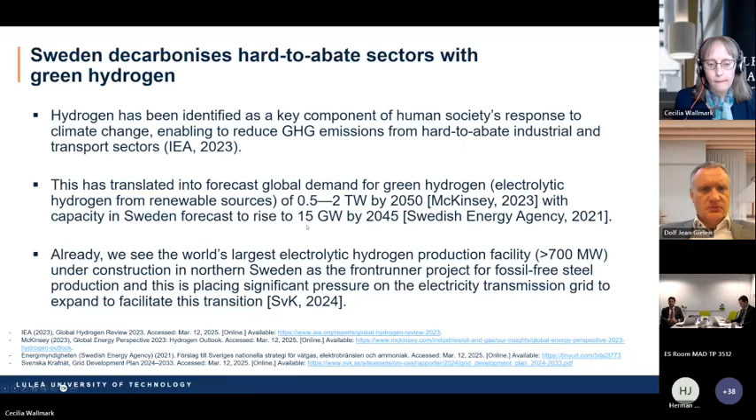This is also a slide showing a little bit on all the activities which are already going on in Sweden. And for the background, we do have a lot of renewable power, hydropower, wind power, and so on in the country. A lot of biomass.

We also have district heating, which is very interesting to see how we could combine with excess heat in hydrogen production or use. There are a lot of sites which have green carbon dioxide emissions. We have plenty of water, and there is capital available for investments.

And as we also represent the university, I like to mention that there have been already around 50 years of world-class research with connection to hydrogen, and of course also regarding the metallurgy questions. So that's also a little bit for the background.

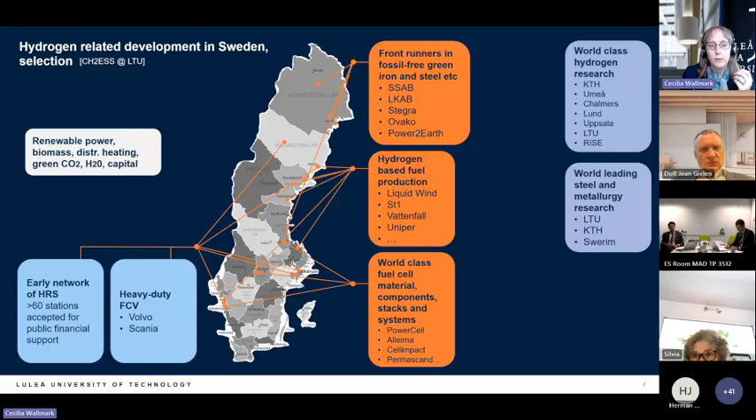And this is really what I hope everyone of you here are already aware of, the Hybrit plant, the first fossil-free steel production that actually showed that this is possible. We can produce steel based on hydrogen to remove the fossil fuels that were used earlier in this process. So this was built and proven and everything, and it started as late as 2016.

So we see this as one of the very good examples of, if you like to do this, you can do it. And the second example that I like to give, that I also think most of you already are aware of, is Stegra, which earlier was called H2 Green Steel, a very, very new company. It's only 4 years old, and they have already built so much of their green steel production plant that they are still planning to have the first production already next year.

And these 2 sites are located in the north of Sweden, where we do need, of course, a lot more power. And there are further sites for ammonia production, and also further sites where the mining company LKAB have planned to have a few of these plants in the near term.

So in total, we will have seen, this is already a couple of years old, but this is some results from the research that we have done to understand how much would the increase of both electricity and hydrogen look like in like 25 years ahead.

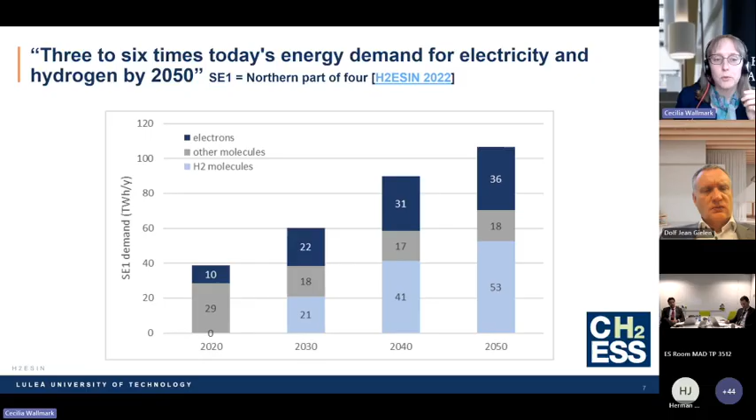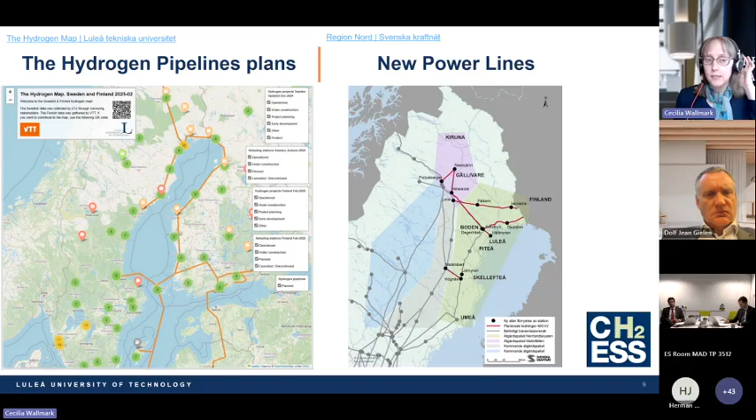So this is what's being built to the right here, and to the left we can see the orange lines, but you can also on this map, and you will have the QR code here to follow the map to see which are all the investments ongoing in Sweden at the moment regarding the hydrogen plants, industries, hydrogen refueling stations, and so on. You can also in this picture see a little bit about all the activities in Finland as well.

Based on this—this is in Swedish, but the title says it all—there is a new governmental task given to the National Power Grid TSO to include planning for hydrogen pipelines. This was placed last year, and they are expected to present their first findings already this autumn. This is so interesting to compare, since this is completely new. This type of co-planning hasn't been forced before.

So based on that, I've collected some questions and statements I'd like to share. I think it's important to understand that the future needs are huge, but also unsure, which means we have a lot of huge investments, which will give a lot of local impact. We will see the impact of, for example, huge land use if we place wind power production additionally in an area, but the power lines and hydrogen pipelines will also have local impacts.

We also need to realize there are differences between these two energy carriers—we can speak about that the whole day. We have to think about and include safety and security. We're also into the questions of combination and cross sections, co-planning in the landscape of these two energy carriers. And we have to consider whether local use or export is what we like to head for, and what different types of investments actually mean for the future.

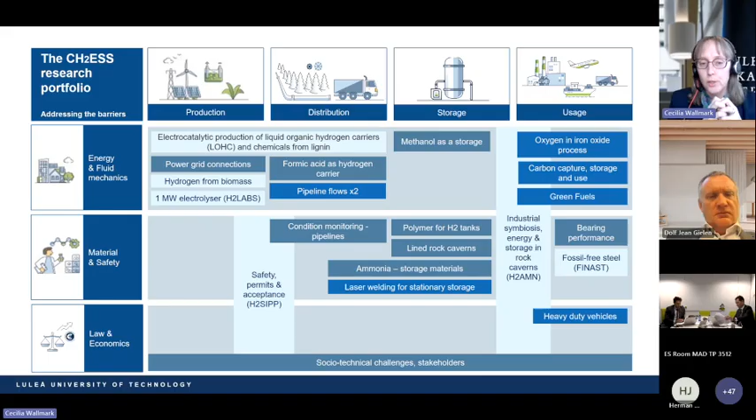This is what we are very happy to do and work with, together with both industries and collaboration partners, as I said. Since the subject of this specific seminar is the combination and planning for the electricity grid, I'd like to mention a group of research we do regarding the hosting capacity—how much

hydrogen could actually be produced given the existing power grids. So we do research, and in this meeting I also have my colleague Peter Haigh with me for further discussions in the end, if that happens.

For example, we're working on operational risks—could we decrease the requirements of the power grid to be able to produce more hydrogen? That's the question, and it's quite relevant. How much could smart grid solutions help increase the possible hydrogen production range? And of course, energy storage and flexibility solutions are both possibilities to increase the amount of hydrogen possible to produce with existing infrastructure, but we could also earn money on flexibility solutions.

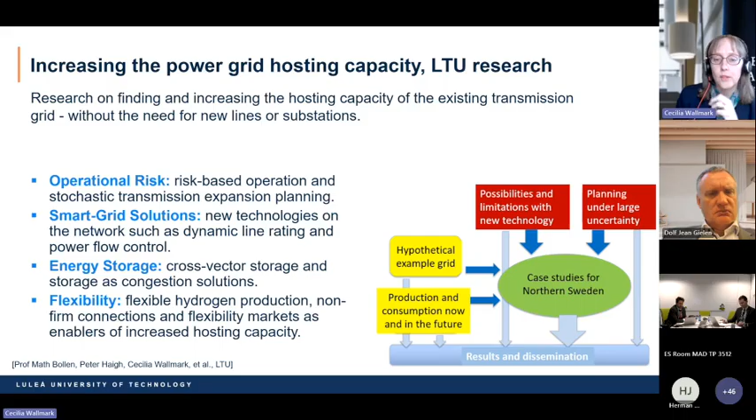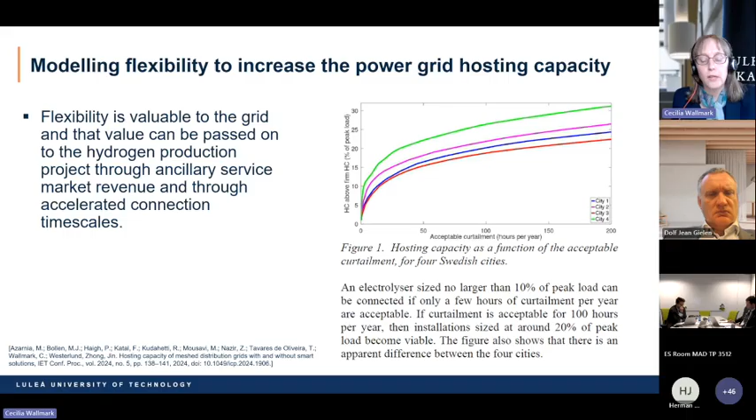So this is very much ongoing research in our university. Here is an example from one paper where we show that if we can accept curtailment only a couple of hours a year, we could actually increase the hydrogen production by as much as 10% of the peak load of the whole city. So these types of modeling and calculations are also part of our research.

And then I'll conclude with some major points, and I also give you a recommendation if you'd like to hear more from me - there's a pod available for the public. But here I have my 3 top-of-mind questions regarding the need for both research and, of course, implementation.

I think it's so very important to have and see political decisions supporting this implementation. You're all very well aware about the risks and the different thinking and prioritization of politicians, but not least, public stakeholders need to continue to support this. This is very, very important, and we also see it very strongly in the north of Sweden, where industry is working in very close collaboration with municipalities, the region, us as a university, and so on - which is completely necessary to get the whole value chain working.

The next question is really how to keep the sustainable part of the development. We see very difficult questions regarding social acceptance, political acceptance, and so on. Here it's very much a question of supporting attractive societies, I would say.

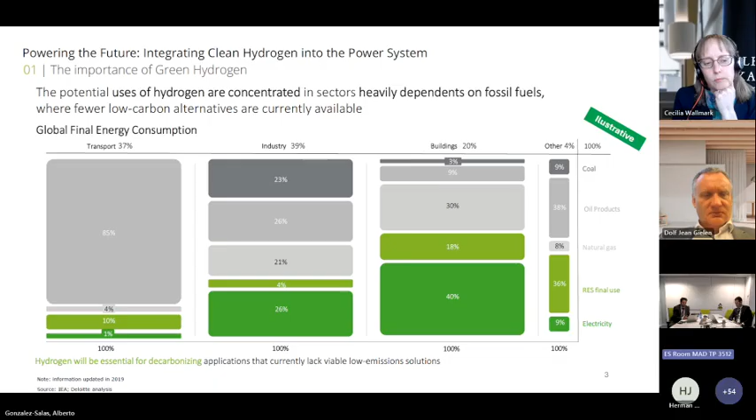So I have a few slides talking about the importance of green hydrogen, but I'm not going to stop here because I think we all know why we need hydrogen. We need hydrogen mainly because it's the only way the world understands or knows how to decarbonize certain industrial processes - otherwise we're not going to be able to decarbonize these things. And also because we can use it for other things, and it can substitute several fuel alternatives that right now we don't want in the future.

There are some uses of hydrogen that we need to understand are not the best right now. Probably electrical solutions are much better than hydrogen-based ones, but this will change once the price of hydrogen goes down. We need to understand that hydrogen is not an energy source, it's a vector, an energy vector. So we need electricity to produce hydrogen, and we need electricity also sometimes to use the hydrogen.

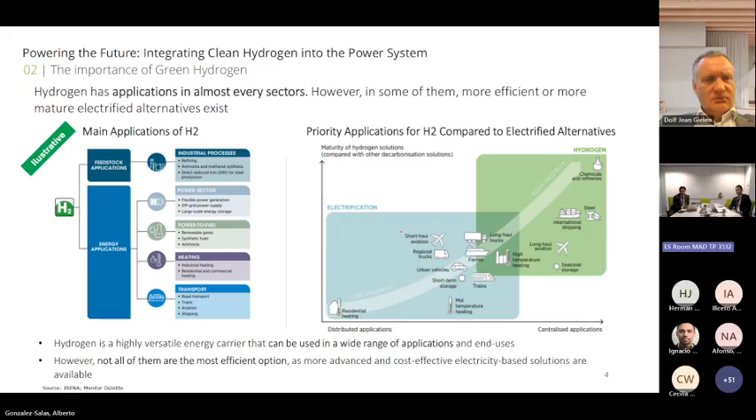And this is a stress for the grids. This is the point of the seminar. As I was saying, we are going to use it to decarbonize industrial processes, and also for production of sustainable products. An opportunity for the electricity system is that hydrogen will be the energy storage of the future, much better probably than batteries, or a complementary use to batteries for energy storage.

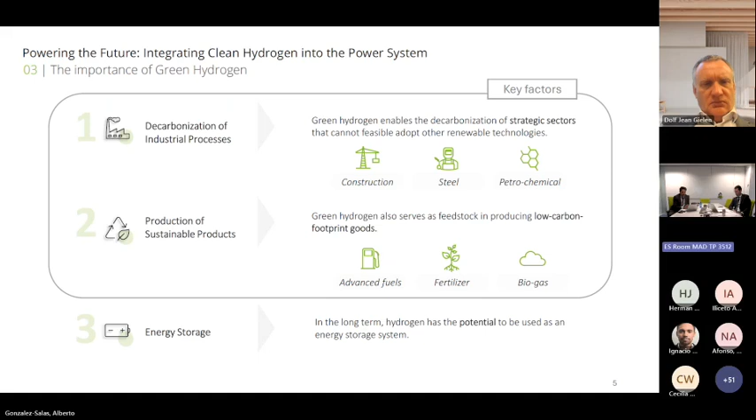But let me go through this data, which shows the challenge we have for the grids. The challenge is to balance the growth of electrification of society, which we have decided to do as a world. We have decided to decarbonize our economy through electrification and also through the use of hydrogen, which needs electricity. So we are going to increase the demand for electricity enormously, for any country, whether for hydrogen production or for the regular demand that comes from electrifying the economy.

And in the middle, we have the grids. When we talk about hydrogen, we can think about producing it just with dedicated renewable generation, or we can connect it to the grid. We can do both things. The issue is that once we have more than 4,000 hours of production of electricity for hydrogen production, the price will go down. And the economics are quite relevant on this issue.

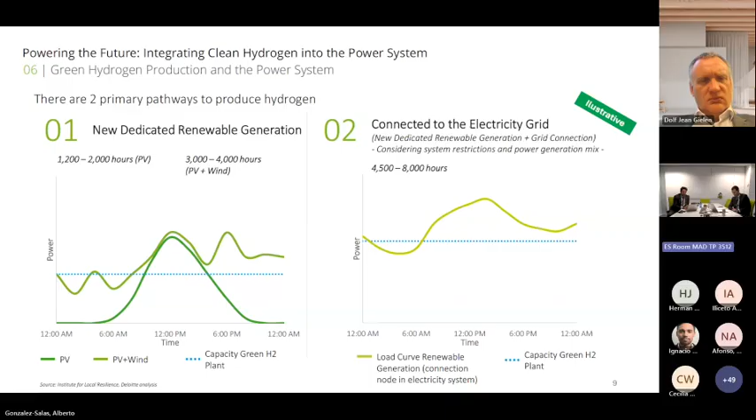Unless electrolyzers develop differently or become more flexible, as my colleague was saying previously, we need to think that hydrogen production has to be connected to the grid, because this is the only way to bring the price down. And if the price doesn't go down, we're not going to use hydrogen. So it's quite important to be able to produce hydrogen with dedicated renewables in the countries that need it, and also to connect it to the grid, and to increase renewables on the grid as a whole. So to guarantee project viability of hydrogen is directly related to the number of hours it's going to produce.

Can you go back one slide? Here's an important data point. What we see in the production models is that when you have more than 4,000 hours of production, you can achieve a more stable cost in your production. That's illustrative, obviously, but we can see in the graphic on the left side, with only a standalone solar plant...

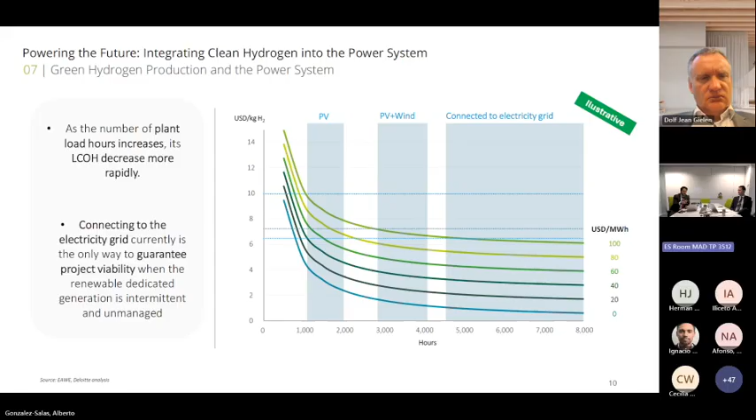So when we're talking about producing hydrogen, we need to think that we also need renewables, not only for hydrogen production, but also for the grid. Because if the electricity grid is not decarbonized, we will produce hydrogen, but it won't be green. So we need to be able to do both things in any country. Obviously, there will be countries, for example our country, Spain, with a big penetration of renewables, but there are several other countries that don't have this right now, and they have to think about this, which means connecting new generation to the grid for producing hydrogen.

That point is very important because the opportunity of hydrogen, as the previous speaker said, is to have green hydrogen or clean hydrogen in order to contribute to decarbonization. But the best opportunity is to reduce the dependence on fossil fuels, especially in countries where fossil resources are not available.

So when we are talking about the grids, we need to be able to manage the connection of hydrogen to the grid, also to incorporate additional renewable production for the grid, and to maintain it as a renewable power system, because the grid is for everyone, not only for hydrogen production.

And at the same time, I think this is quite important: hydrogen has to live with other decarbonization processes, for example transport and electric vehicles. So we need the grid to be able to support not only hydrogen but also electric vehicles.

Also, when we are talking about decarbonization through hydrogen for industry, they are usually going to consume much more electricity, not only for the hydrogen but also for the transformation of the processes. So the demand of the industry is going to be higher for the grid.

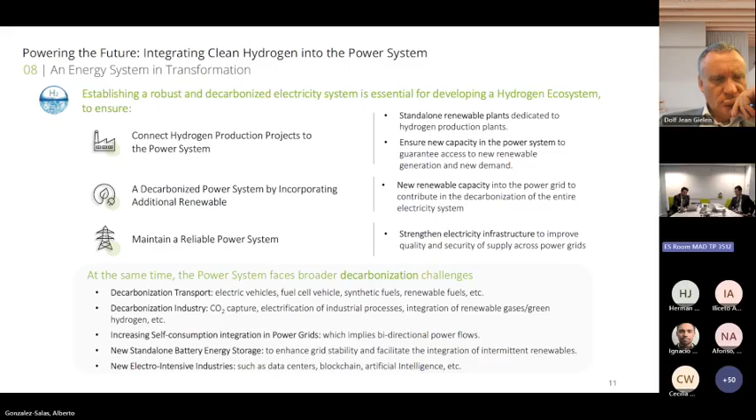But when you are talking about producing hydrogen, you need to have a decarbonized system. Otherwise, you are going to produce it only with dedicated renewables, and this is not going to be sustainable in the future. Let me say it like this.

So countries like China - you were talking previously, Dolf, that we have projects in many places. Right now, I think it was this morning, one of the main companies in Spain made an agreement with Morocco for developing the Sahara, huge production of hydrogen. Turkey, Egypt, Australia - all of them want to be in a position as producers of hydrogen.

But their grids need to support all the environmental factors that we have been talking about previously - more demand from industry, more demand for data centers, more demand for electric vehicles, etc.

And not all the networks are as ready as the others. This is not only about developed or not developed countries - it depends on how the power system developed through the years, the history of the networks, and how ready they are to support this pressure.

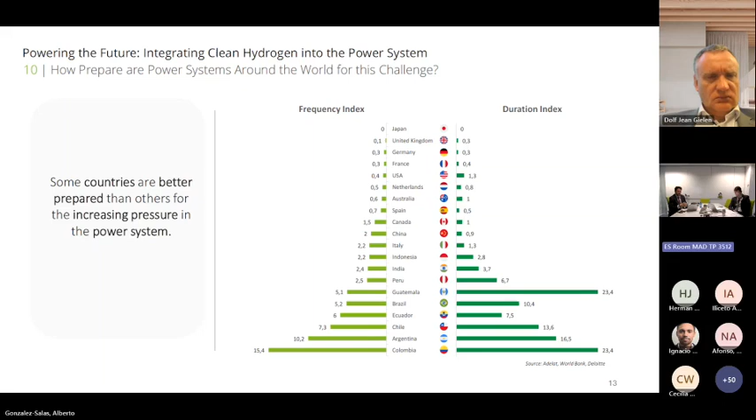There are regions even in Europe - we have several examples where the congestion maps are quite heavy right now, not even thinking about producing hydrogen. This is the case, for example, in the Netherlands, or we have the same in Spain. We have several places like this.

So when Dolf was talking in his introduction about where do we produce hydrogen - not only which country, but where in the country can we produce hydrogen - this is not so easy, because the grid is going to be the point that determines if you are able to do this, whether in 6 months, in 2 years, or in 7 years, because the grid needs to be developed.

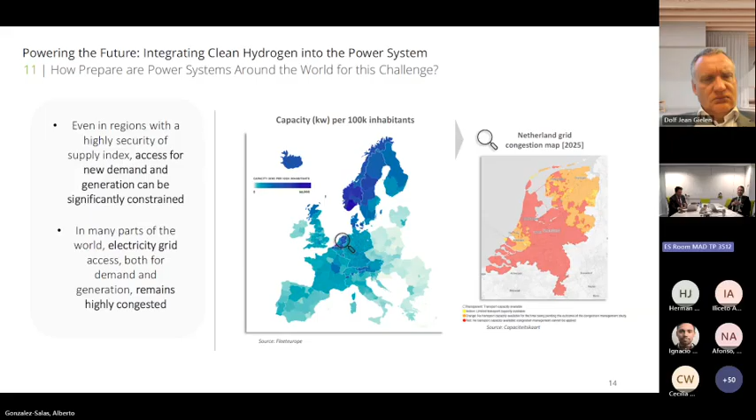Even when you have capacity in the grids, it's important because you have to connect the points of production with the demand, and typically they are not together.

Most of the projects are focused on the hydrogen valleys, but in future project planning, you have to reinforce those networks because you need the connection to a grid. You need to make new investments. The main hydrogen production projects across Europe are next to the consumption, because it's difficult to think about producing hydrogen very far from consumption, as we don't have the pipelines for using the hydrogen, and also because the network needs to be ready for this.

When we connect a hydrogen plant to the grid, it's not the demand of the hydrogen plant that's the problem for the grid. The problem is that you need to be able to maintain the system working for the rest of the users. That's the problem for the grid. Even if the investors can pay for the connection to the grid, of course they are going to do it, the rest of the users of the grid are the ones who have to pay for the rest of the connection that you need to do.

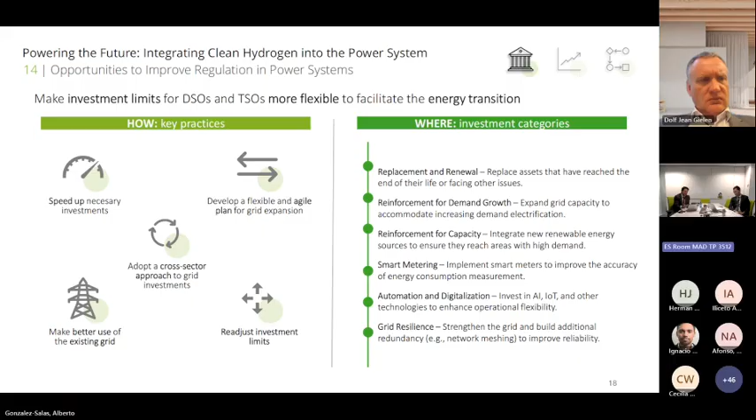Cecilia has said it: smart grids, flexibility, storage in the grid. This is not so easy to develop in the grids. This is not something we can do in 1 or 2 years. It needs to be planned, and the companies need the right regulatory environment to make those investments, because otherwise it's not going to be developed.

And this is all about the remuneration model and also the tariff. Who is going to pay for it, as we say in Spain? There are many things on the grid that are usually paid by the users, so the users need to understand what they are paying, and the tariff needs to be properly designed so that users pay only for what they own, not the rest of the decarbonization we are going to do, because otherwise the tariff is going to increase too much, and this is going to be a problem for any politician or any country.

Let me go back, I don't have too much time. You are going to have the presentation for any discussion.

Our conclusions about this is that we need to ensure the reliable grid access, to be able to connect all the renewable energy that we need, and also the demand we are having, including hydrogen production. We need to advance on a proactive and cross-sectorial approach to grid planning.

The example that Cecilia mentioned is, for me, a great example. In many countries in Europe, companies are demanding this. Okay, we made a bet as a country for hydrogen — this makes a lot of sense, but we are not making the same bet on the grids, and the grids need to be part of this.

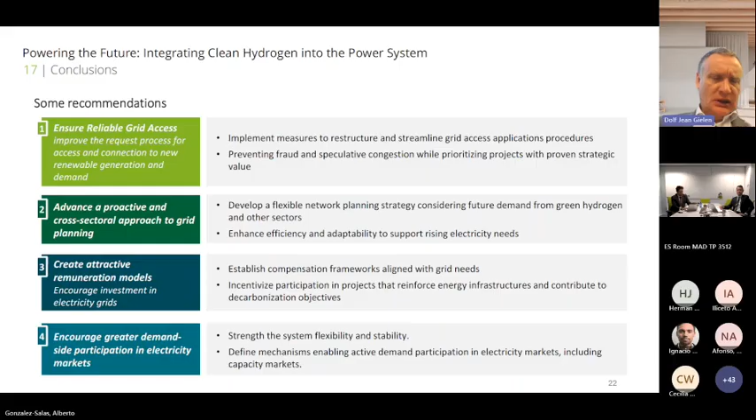Thank you, Alberto and Noe. I think this was very, very interesting — more of a grid operator perspective. I think the next presentation is a nice continuation of that, because we'll hear from Antonio Ilceto, who is an advisory board member of Dii Desert Energy, but who's also employed by Terna, the Italian transmission system operator, in international operations within strategy, planning, and dispatching.

His field of activities includes coupling of systems, including hydrogen and EV impacts on power grids, and he is active in many international organizations. Antonio, the floor is yours.

Thank you, I understand the slides will be moved centrally. If you can put the first one, or shall I share the screen? Ignacio, can you show the slides? Yes, absolutely, I can share the screen, maybe it will be better. Can you see them? Yes, Antonio. Can you go to presentation mode? Yeah, thank you. Like this?

Yes, perfect. I present here some results from CIGRE, which is an international association of electrical engineers and grid professionals around the world. We have recently concluded a thorough study on hydrogen, which will also be mentioned later on. There I'm chairing the Committee for Power System Development and Economics. I understand the time here is paramount.

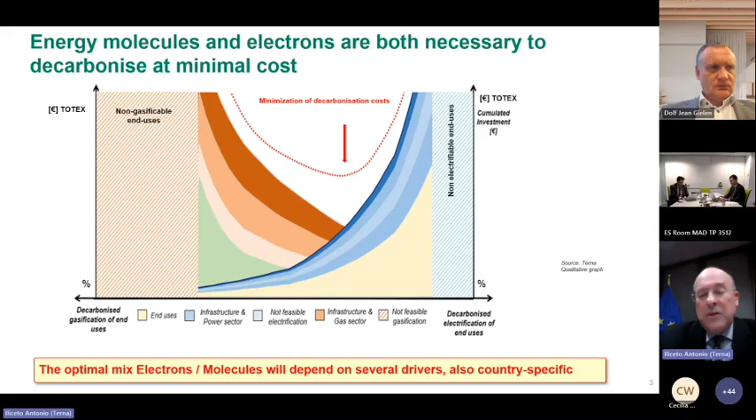Well, first of all, one of many possible representations of why we need both molecules and electrons. And by molecules here we are talking about hydrogen and derivatives, because there are some decarbonization processes which can be easily or cheaply done by electricity, others which cannot, and the same is conversely valid also for gas, for not-gasifiable end users, let's say. So there will be a mix, an actual technical-economic minimum between how many electrons, how many molecules. This depends on the processes, but also on other drivers — some of them are also country specific, so there is no one-fits-all solution here.

So in general, taking a very system-wide approach — I will use this system approach all throughout my presentation — from an energy system perspective, not only electricity, but gas and hydrogen, these three have to cooperate a lot. We can talk about direct or indirect electrification. Direct is when we can change an industrial, residential, or building process from a fossil energy source to plain electricity.

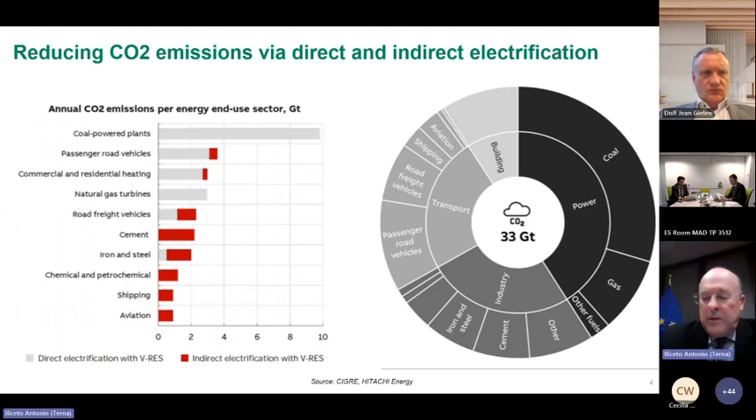So this is direct electrification, and this is one of the most important drivers of the electricity system, including grids, in the next decades. For other economic sectors, we talk about indirect electrification — if we are referring to green hydrogen produced with green electricity. So in the end, it's electricity used for final users through this hydrogen process, always starting from the abundance and increasingly cheap availability of renewable sources. That's why until 10 or 20 years ago it was not feasible; now we have a lot of cheaper electricity from renewables, so we can use it also in this way — indirect electrification.

For reason of time, we won't go all through this table, but just to mention the principle: which way, direct or indirect electrification, is better depends mainly on technologies which change over time. Luckily, we are evolving fast in the technologies, and on all the cost of the supply chain, because case by case the supply chain can be different. Not only production of hydrogen, but also delivered hydrogen cost is relevant here.

All in all, we can say this starts to be a bit old already, because something is already being challenged in the transport sector. For light-duty vehicles, there is quite a convergence, an international consensus, that direct electrification with battery electric vehicles is more convenient. While for heavy duty and other forms of transport, this is still something to be observed, depends on technology. And for industry, there are definitely some high temperature industrial processes which cannot be electrified directly, so molecules are the best option. Then for domestic and commercial, it depends on each single case.

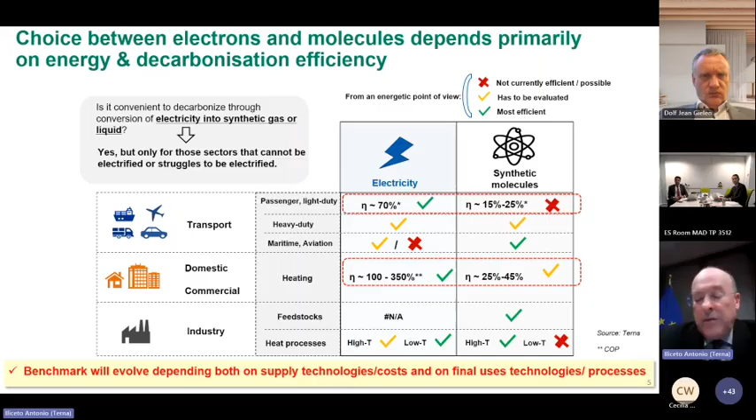So this has to be taken carefully, because it's not electrons against molecules, it's not a religious war where I want only electrification, direct or indirect. It has to be seen sector by sector, I would say even sometimes case by case. And this is because we have to incentivize new technologies, those which will be more efficient from a decarbonization point of view: €1 spent and how many grams of CO2 avoided, but also efficiency in terms of energy, and efficiency also in terms of infrastructure, because if we can use existing infrastructure, we save a lot of new investments.

So there is no consensus on all the decarbonization best processes, but there is consensus that in the end, the final case will be with a lot of electricity and also some decarbonized heat.

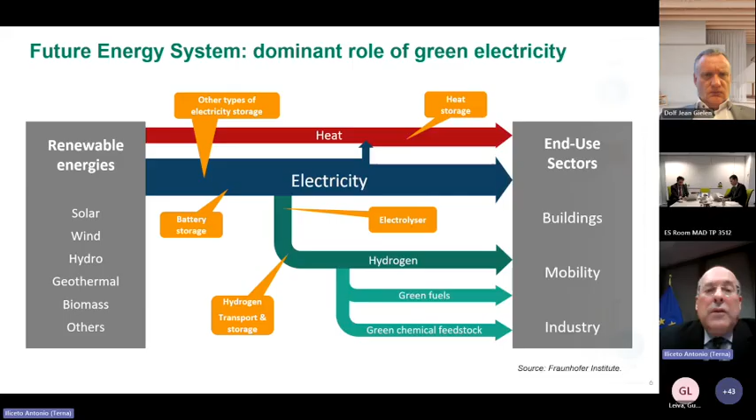Hydrogen will come from electricity, so we will have the three main vectors: heat, electricity, hydrogen. The yellow boxes that you see here mean that together with this new future system, we need to develop and deploy a lot of storage in the form of heat storage, battery storage, other kinds of electricity storage, and then all the hydrogen transport and storage infrastructures. So it's not only the electrolyzers.

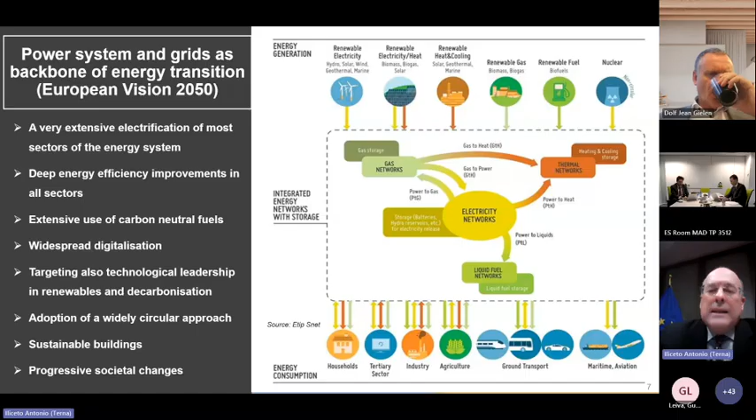In the end, one of the many nice figures you can find around in literature and webinars is that if you consider the integration of electricity networks with gas, then part of the gas becomes hydrogen, and some new hydrogen network is developed, also thermal networks, district heating, and other kinds of networks will be developed. All in all, electricity networks play a central role, because when you talk about sector coupling, most of the times the sectors are coupled through or with electricity. That's why I focus my presentation especially on the electricity side.

So the impact on the power system, we can say there are four main points. One is electrolyzers come with a lot of new renewable generation, so there is an issue of the need of a huge quantity of new generation capacity. The second point will be on the planning, the third on operation, and the fourth on flexibility. Let's see them one by one.

First of all, as mentioned also in the introduction, the very first decision when you have a business case—because you don't build the electrolyzer and just operate it waiting for somebody to offtake and buy electricity day by day—you need long-term planning. It's an industrial investment, so you need to know where to localize your electrolyzer, and how to transport to the final use. The two main cases, which are extreme, with a lot of partial in-between cases possible, are: place the electrolyzer where the renewables are available, so you avoid transporting electricity but then you have to transport hydrogen; or the opposite, place the electrolyzer where the hydrogen demand is, and then you need to transport the electricity until there.

There are many considerations here, but the main point is, first of all, for very short distances we talk about hydrogen valleys, which will probably be the first cases to be built, where electricity production, generation of hydrogen, and consumption of hydrogen are all concentrated in a small area, so no transport and storage infrastructures are involved.

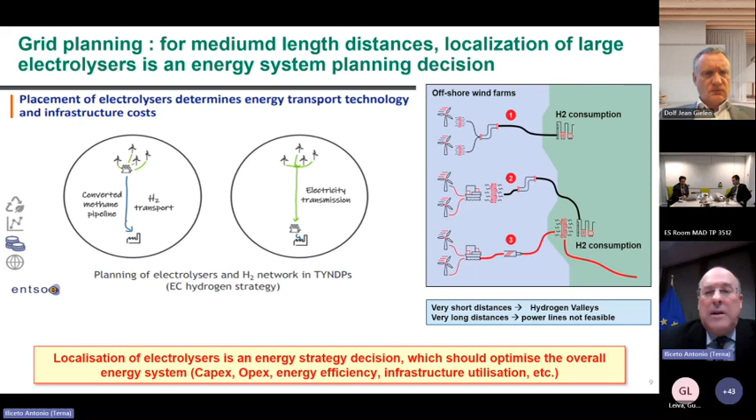It was very interesting for me to know about the Swedish example, where the electric TSO has been entrusted also to plan for hydrogen, which is not the case in all of Europe yet.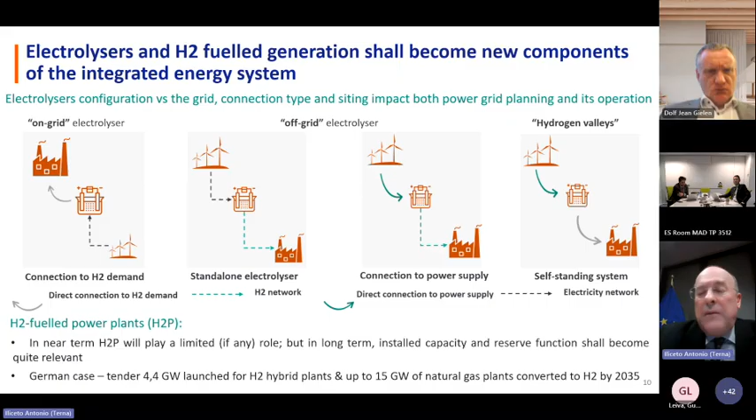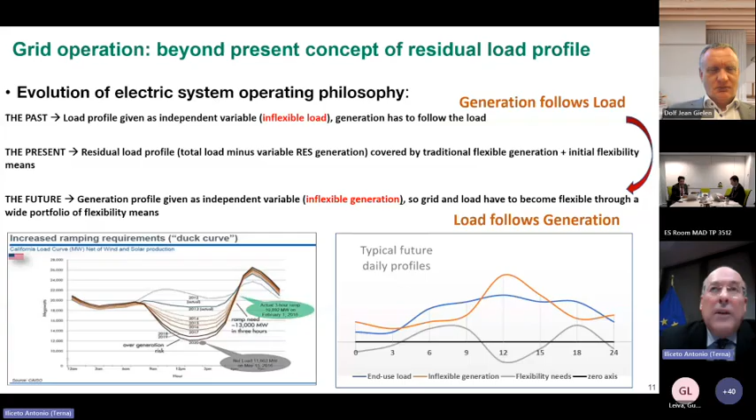Let me go a bit faster here. The flexibility need has already been mentioned by previous speakers. So now we move from a principle of operation, a philosophy that generation has to follow a load, which is an external variable, to the opposite. Generation becomes an external variable because it's weather dependent, and we don't want to curtail or lose possible generation of electricity. So the load and the storage or interconnection exchange flows have to follow the generation. For grid operators, you understand this is a complete 180-degree paradigm shift. It's not easy in all the technical aspects, but they are not part of this webinar.

So we investigated in particular what kind of flexibility can arrive from electrolyzers in terms of grid services. Here you see some acronyms which may not be known to everybody, but mainly it is about frequency regulation, voltage regulation, and also active power regulation. So with the three main technologies that we have now and in the foreseeable future...

Let's look at the final bottom sentence: actually electrolyzers, which are not built to have a flexible operation, because they would like, as we have seen in a previous slide from other speakers, to run for as many hours per year as possible, and possibly at 100% rate, so they can have their capex, initial cost, and all fixed costs spread on more hours, thus reducing the levelized cost of hydrogen.

But actually, if we design them, if we specify them, and if we operate them in a certain way properly, they can easily provide these grid services. It's a low-hanging fruit, just has to be designed like that. It is not in the business plan of who buys, who commissions an electrolyzer, but with a little effort, they can do this too.

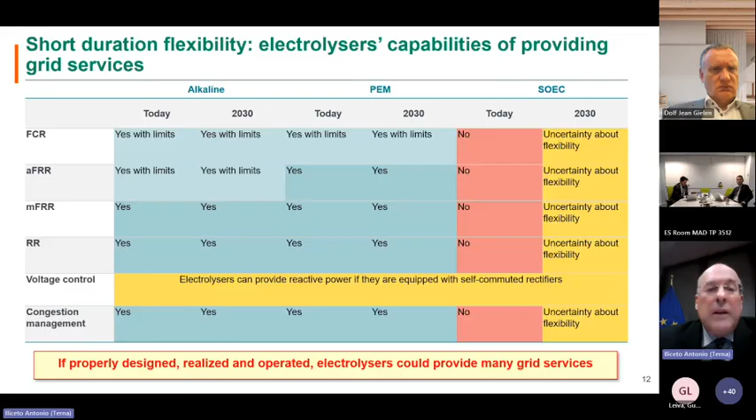And of course get a revenue stream, because providing grid services means being paid for that. And this is about short-term flexibility, because we have to operate the grid in the range from milliseconds to seconds to hours. But then there is another aspect, which is not on the electricity side, but on the wider energy side, of which electricity is only a part.

We need, for reasons which have already been explained, so I won't lose time on that, long-term flexibility. Just think that the sun is shining only during the central part of the day, so we need to cover the day-night cycle. And overall, we have monthly or even seasonal cycles to cover. So we need very long-term flexibility.

And if you see this graphic, the red part is about hydrogen. It's one of the few possibilities. It's technically possible today, and from some performance points of view it's also one of the best. So we need hydrogen also for this, and this cannot be given as a service from a single electrolyzer.

You need a system, a regulation in place, and somebody has to pay for a sort of strategic reserve, as we have now for gas. In Europe, for example, we have an obligatory 3-month gas stock to cover not only the seasonality but also possible supply shocks.

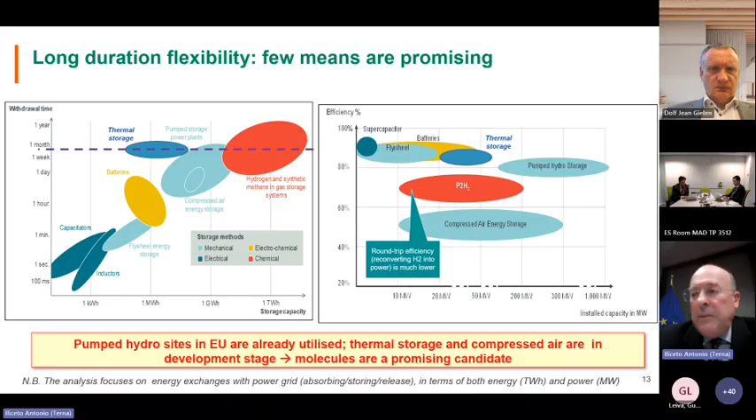So this should be translated for hydrogen as well. And so I will just take a summary here. We need hydrogen, we need its flexibility in the short term, which is a sort of demand response, if we want, from electrolyzer operators.

To do this, we also need not only technical possibility from electrolyzers, but the willingness of the owner, because nobody can be obliged to provide flexibility. But we also need to decouple electricity from hydrogen -- that is, electricity input from hydrogen production, and hydrogen production from hydrogen output.

So we can only do this if we have storage and transport, so let's say a logistics system. To do this, we need to develop logistics, which cannot be done by individual electrolyzers or private investors. This has to be a system.

So as we did for the electricity and gas networks, we will have to have a hydrogen logistics system, which has to be planned together with the development of electrolyzers, which in turn have to be planned together with new renewables. This paramount coordination is, in my opinion, the most difficult part.

And we risk a mismatch otherwise, because the transition period will be long and hopefully not too bumpy, but it will be bumpy. What we see already now, for example -- sorry, this is an extra example -- in the automotive electrification industry, we went too slow, then too fast, and now some big companies are suffering because of this. This is the bumpy transition type I am referring to.

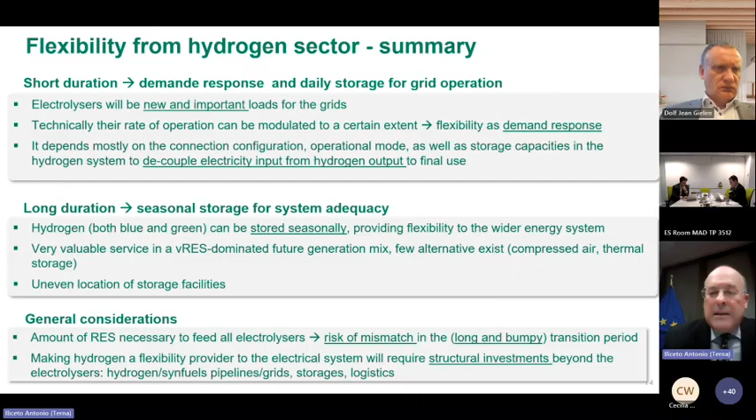So electricity is needed for hydrogen, hydrogen is needed for electricity. This taxonomy that we have done now is not on the planning, but on the operation. Once you have this electrolyzer, which can be flexible, we can have different types of operational mode.

If you see here on the second column, starting from the left -- first of all, that was referring to the European continent. We focus only on electrolysis-based generation of hydrogen, only on grid, only domestic, because if it is not domestic, there will be imports from other countries. So this will not need any integration with the existing electric grid.

There will be some hydrogen produced not with electrolysis, for example the so-called blue hydrogen, and of course again this has no impact on the electricity grid. And we will have a portion which is questionable -- I've seen also on the chart before that there are different opinions on electrolyzers which are placed off-grid, that is with dedicated RES. Again, this is not impacting the main grid.

So if we focus only on the on-grid domestic electrolyzer based on the upper part -- I'll spare here all the reasoning behind it -- we identified these four operational modes, let's call them business models actually.

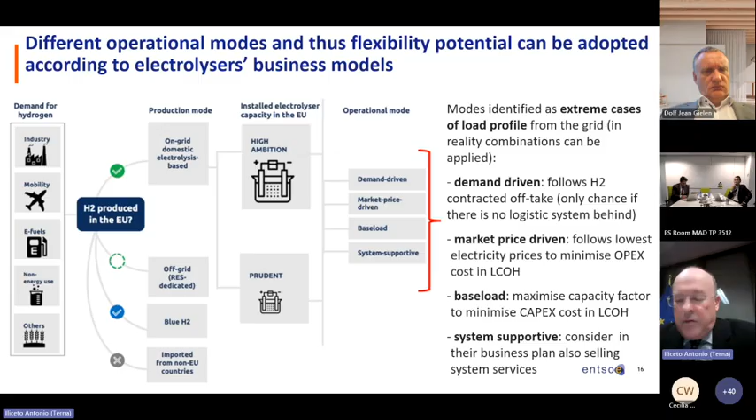The last one is a bit ideal. It's the one which considers in the business plan also selling of system services.

So we have seen that a crucial point, which is again here in the title, is that we cannot consider only electrolyzers as the physical interface between electricity and hydrogen sector. We have to consider all what is around.

All the infrastructure of hydrogen is very costly, takes a long time to be built, a long time to recover the capital. One shortcut is repurposing pipelines from natural gas to hydrogen, and repurposing underground large storages for natural gas again to hydrogen. This saves a lot of money, but for safety, technical, operational speed, etc., it still requires some adaptation.

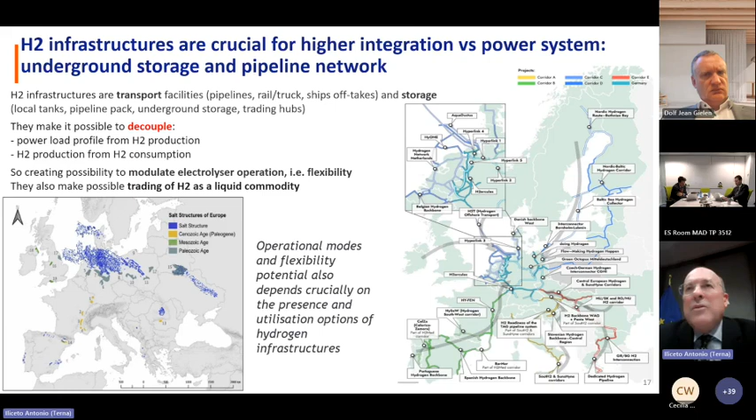And also you cannot do it overnight, because the transition—again the problem, the final situation in the year 20XX, there is a consensus, but how to reach there? It will be a bumpy transition. This is the point.

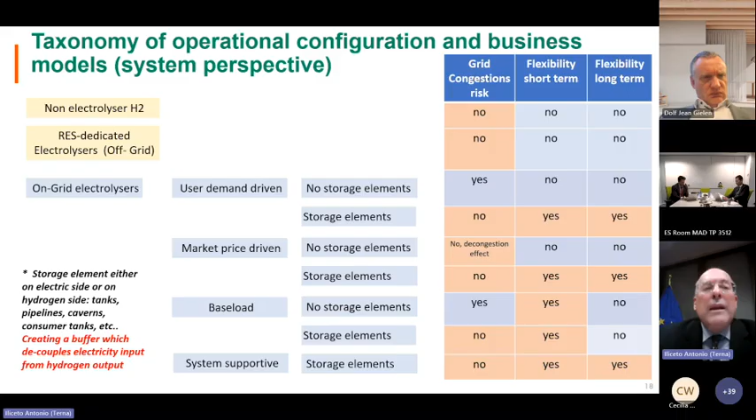So let's not forget that green labeling is also very much influencing here. For example, in Europe, it has been imposed that this three-principle—first, to label low or zero carbon hydrogen produced, it must be produced with assets, new assets built on purpose, either if they are grid connected or not. There are sub-cases, but the important thing is that you don't have to cannibalize

renewable production, which can go to decarbonize other sectors. For hydrogen, only for hydrogen, there is this additionality principle.

And then something which is related to the grid, the physical capacity to move electricity from one market zone to the other and from one time period to the other. These are the market zone and the time slot are the ones used in the electricity market.

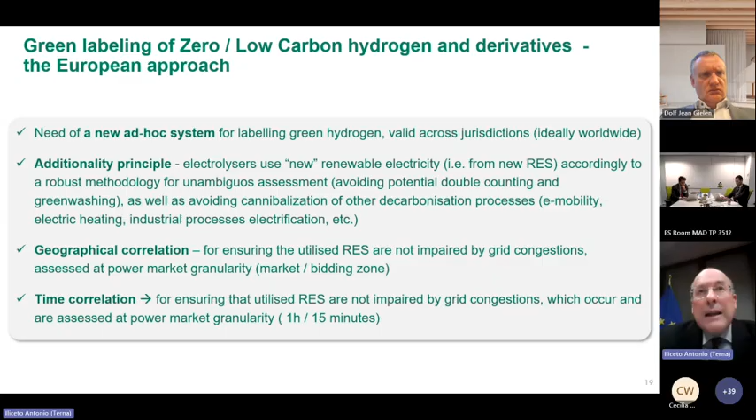So if these two principles are not respected, you have the concrete risk that some of your hydrogen is produced with fossil fuels. So to be on the safe side, that was initially decided, although it is not straightforward to be applied always. But this influences all what we said before: the business model, the operational mode, and then the integration. So we have also this regulatory point.

So here, I would like you to look at the right part. The point of view which I'm bringing here is from the grid operator. We have to run the grid in the short term, so we look at short-term flexibility, but we also have to be a power system operator—not only the grid, but the whole system, which means the grid and all the devices which are connected: the generation, distribution, transmission, consumption, etc., and the sectors which will be coupled—EV charging in the future, heat pumps, electrolyzers, etc.

So there we need the long-term flexibility. You see at the bottom, if you are interested to deepen into this, the recent CIGRE technical brochure which I was referring to is available on the e-library of CIGRE. And just a final point about using hydrogen as a vector of energy.

Vector means it is always a vector, but a vector means to transport a long distance and bulk quantities, more quantities of energy than can typically be transported by electric lines. So that is an example of some calculation, which is exemplary. You could adapt it to any case, and it was calculated a couple of years ago.

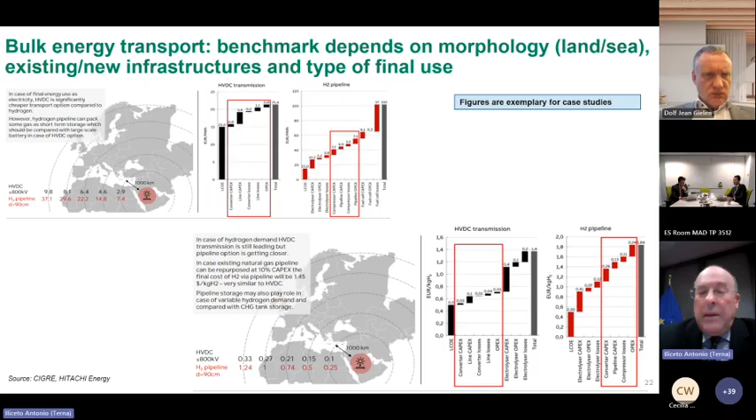The reference costs here are changing very rapidly. So just to go from a generic point in the Middle East to another generic point in Europe, according to distance and other characteristics, the main thing we can say is that if the final use is electricity and the power line is overhead, which is much cheaper, typically this is the most convenient way. But if the final use is hydrogen, the costs become comparable.

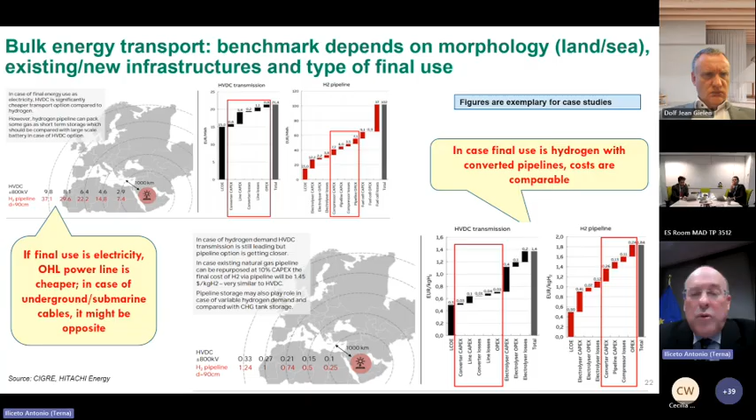So it's not only a cost of transport. You have to have a full end-to-end business case, a use case, I would say. And if instead of an overhead line we have to do cables, submarine cables, which are 7, 8 to 10 times more costly, then the comparison can be more favorable to hydrogen. So this is how you should assess it, with all these parameters and boundary conditions.

As a Desert Energy Advisory Board member, I would just mention before closing that this is an important case worldwide, because there is a lot of possibility of cheap RES production, as you can see in the upper left side, in all the countries of that region. And indeed, in the bottom left, you see projects which are coming along. Some are also huge, like the NEOM project in Saudi Arabia.

This is again not completely recent, I think 1 or 2 years ago. If you sum up these, and only these which have been announced and have a more concrete possibility of being built, they arrive at 10 megatons per annum, which is maybe by coincidence, or maybe not, the imported demand of hydrogen which initially the European Commission had set for Europe.

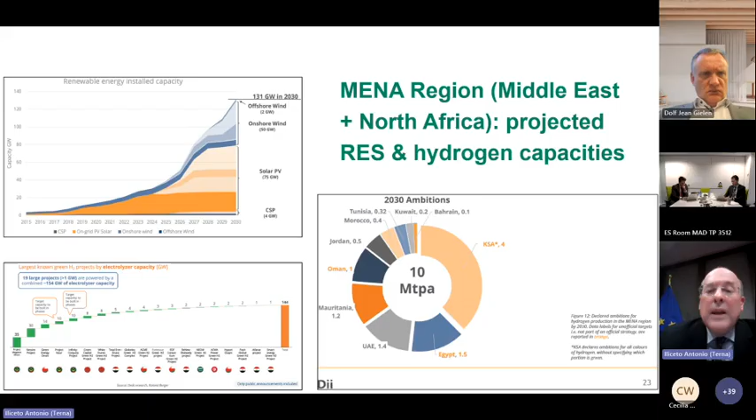So this is a concrete case, and from the transportation point of view, you can use both the gas pipelines which are there, or shipping. If you are, for example, in Oman, in that area, it might be more worth it to ship with vessels, which can then go everywhere in the world. The three main markets will be Europe, Far East, and North America, very probably.

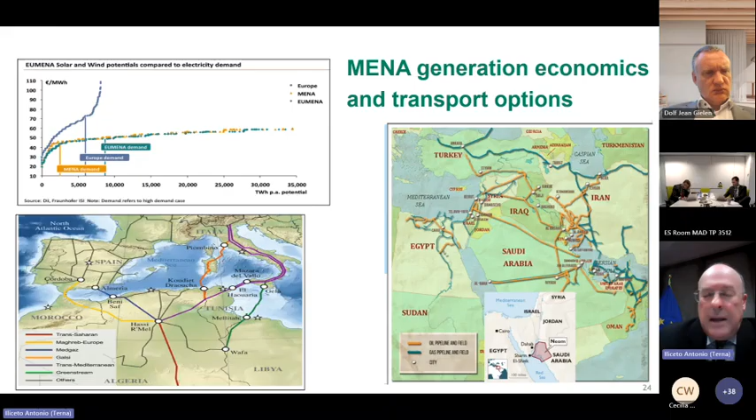This is what we normally call, in electricity cost-benefit analysis, also towards regulators, social welfare. And this is the very last point: in DII there are many publications, most if not all publicly available on the website and free of charge, spanning all aspects. One of the last ones is on liquid hydrogen, because this is another possibility for transporting it via ships, and some also investigate ammonia as a liquid transport, because it is technically much more feasible. So there are various ways to transport hydrogen.

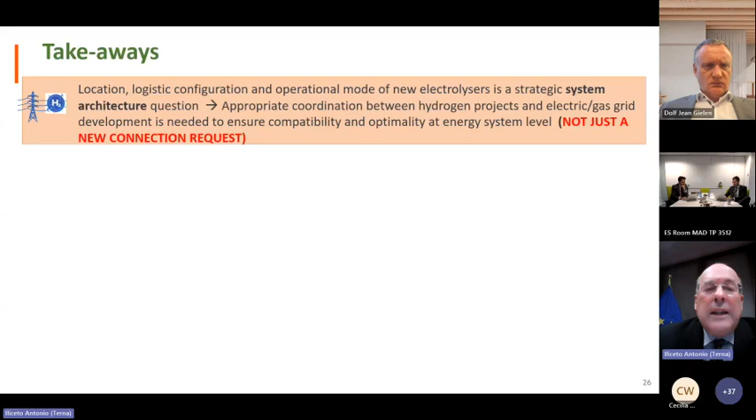So to finish, I won't go through the takeaways, but let's just say that hydrogen is not only about production, not only the electrolyzer, which is a physical interface with the electricity system. We have to look at the whole infrastructure and end-to-end system to find a win-win solution between the business case and the needs of the system. Sorry if I went a bit long.

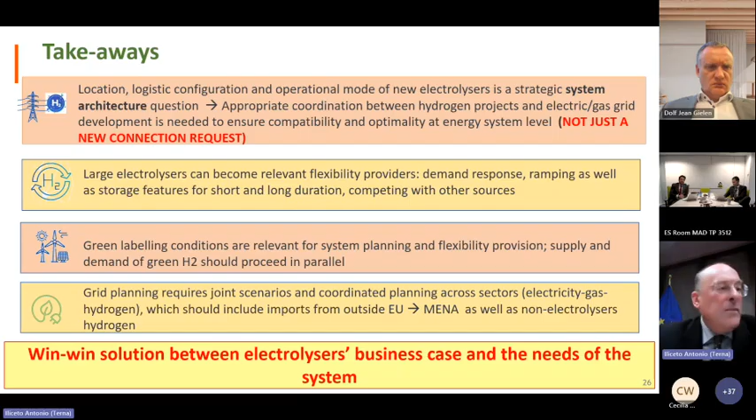I hope what you got from the 3 presentations is that there is indeed an important issue around systems integration, which is not an easy issue. It has many dimensions that need to be considered. If you follow the chat, you can also see there are strong opinions on some of these topics.

I think all 3 presentations had a bit of a European perspective on this. So the question, perhaps from a World Bank perspective, is also: okay, what now for a developing country that wants to export? Does all of this apply, or would some of the answers be a little bit different? But I want to give the audience a chance to ask questions. If you have questions, please raise your hand.

In the meanwhile, to break the ice, I can say that yes, European, but for example, in my last part, this Desert Energy, DII, is looking at many countries which are out of Europe, starting from Morocco, Mauritania on the Atlantic Ocean up to Oman, which is in Asia, facing the Indian Ocean. And from there, export can go worldwide, anywhere.